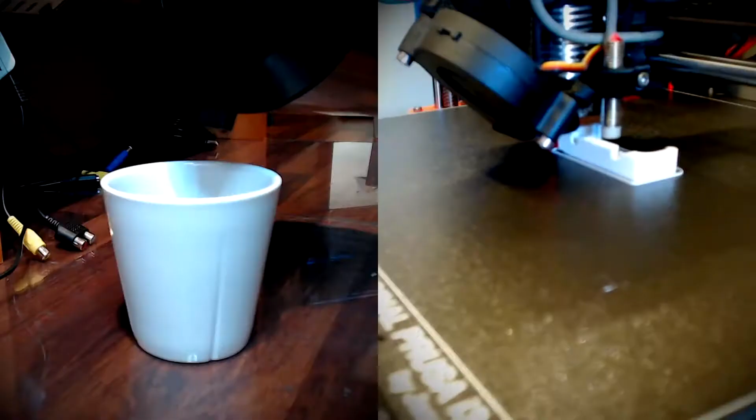This is a Commodore 1084S video monitor, and I am borrowing this from a friend. Well, I'm basically doing him a favor, because he would just keep it in his garage and ruin the whole thing. The thing about these monitors is that they usually have an issue with the lid in the front. This monitor is no exception, so let me just push, and as you can see, it just falls out.

So as you can see here, there's this notch and hinge that just goes together like this. Easy enough. There's just one slight issue, and that is that this side doesn't even have a notch. It's completely broken off. So that's what I'm hoping to fix today. I have a couple of ideas, so let's just get started. First of all, we need to clean this though, it's horrible.

Alright, let's just get this cleaned off. There's a lot of dust and some marks on the front as well. I don't know if they're scuff marks or maybe we can rub them off. Let's just have a look. Now, another issue with these is that the hinges are often broken, so we have to be careful that we don't break anything else while cleaning this. It's nasty.

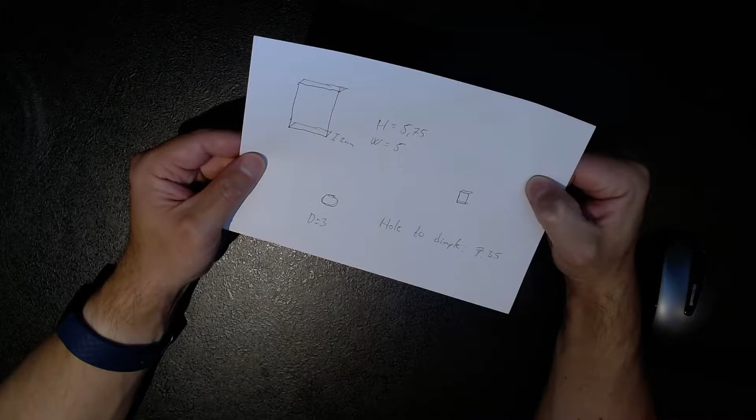As you see, there is not much room, so it would have to be a couple of layers thick at most. Well, I say at most, but we can't have less than one layer, and I think minimum is going to be 2. Now, if that doesn't work, my other idea is to do the same thing, but have an arm coming out here and then having the notch on the inside of the hinge. That should also work fine. It will show a bit more, but I think it'll be fine. Okay, I've taken some measurements, so let's just jump into Fusion 360.

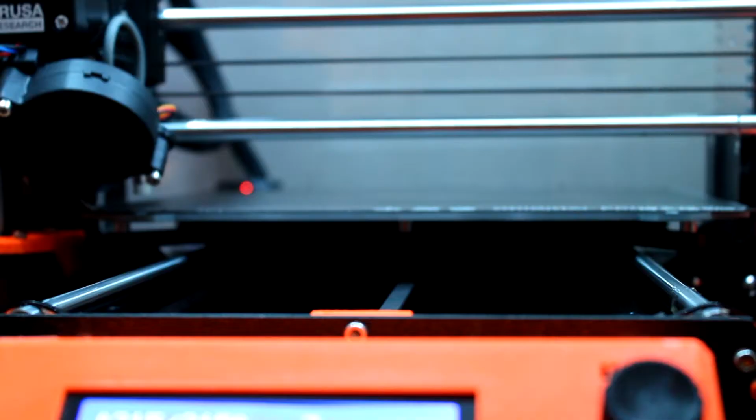So this is the first design I came up with. I think we can just press fit this into the opening in the monitor, and then this just sits flush at the end like this, and that's our new notch for the hinge. Now I am thinking that this is going to be too wide here, because I think it's 4 layers, so that might actually be 0.8 millimeter, and I think that's too much. But let's have a look.

As you can see, I have inserted the 3D printed pop-in hinge thingy. I can already tell that this is gonna be an issue. It's too thick here, but we can have a go and see what happens. The hinge is supposed to go like that. Right, so as you can see, it builds kind of far out. I think it's about 1 millimeter.

So I think that's going to be an issue. I have the lid inside the hinge on this side, and if we take a look at the other side, you're gonna see that it hits the pop-in hinge. That's going to be an issue. And even if I do push completely up against the wall, it's just going to be too tight. I'm just going to end up breaking something. So that's a no-go.

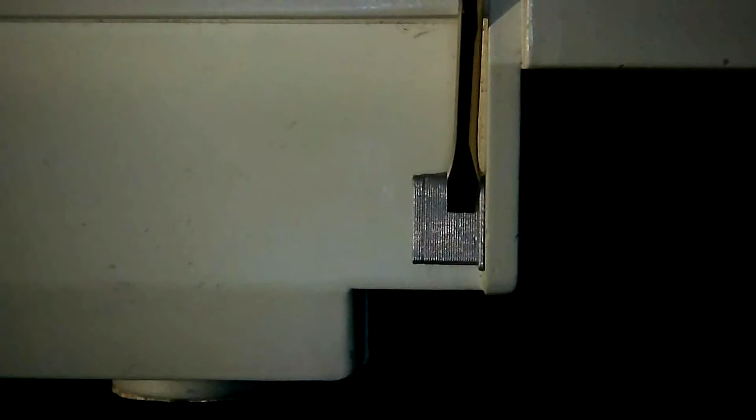Second try. As you can see, this hinge is actually way shallower on this tab here. But as you can see, it's also missing the notch, and that is because it already broke off. The reason it broke off is because I did actually manage to put this in place over the notch, but it was just too tight still. I think we have to switch the design and just go with the notch arm on the inside of the hinge. So this is version 3.

This is the second solution I was talking about. So this goes into the monitor like this, and the notch actually sits on the inside of the hinge. So in this case, it sits like this on the inside instead of the outside. As you can see, same issue, I've already broken off the notch.

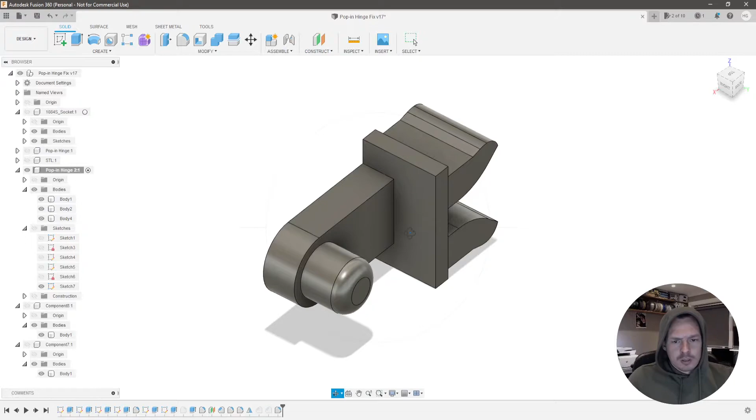So we're back in Fusion 360. I have been doing some improvements and just been working on the issues we had on the previous revisions. So I've removed some material and just did some touching up. So let's just send this to the printer and let's have a look.

Okay, so I finally think we're onto something. But I changed a few things. As you can see, I've removed some material around here. Like I made this smaller. It was actually rubbing up against the lid itself, so I think that's what contributed to the notch breaking off a few times. Still the same. So this goes like that, and this just presses into the monitor, and we should have a nice hinge.

Okay, we're getting there. So this is a few iterations later, but we finally have a working hinge. Look at that. That is pretty good. So this is the close-up on the microscope. I think that's really good actually. Let me try and close it.

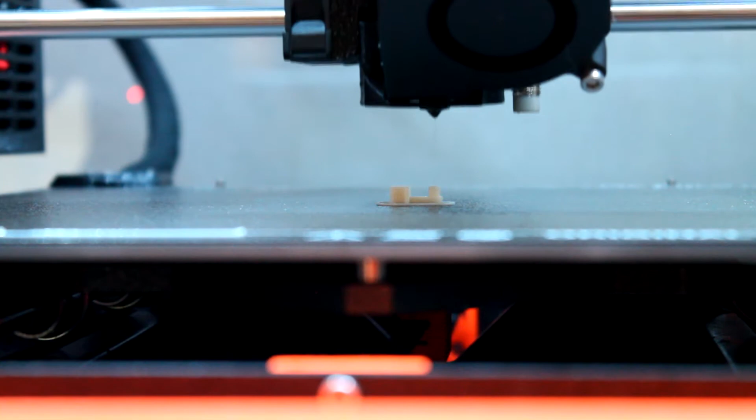So I think we have the final design. I printed this in a white-ish PLA. It's like off-white, the closest one I have to the color of the lid itself. It's a bit whiter than the lid, but it's as close as I can come. This also goes on the inside though. So let's give that a go then.

And there we go. Look at that. That is just lovely. It's not a complete match in color, but it's pretty close. Not too bad. That is really nice. I am very happy with this result. I think this is such a good, unobtrusive fix to the issue. It just pops in and you have a new hinge. Very, very nice. No glue, no destruction. I'm very happy about this.

It's obviously different than the original, but it's still a very nice mod, I think. Well, not even a mod, a fix. Perfect. There we go. It just pops in just like that. Very nice and clean. And then you can just pull it out just as easily if you want to.